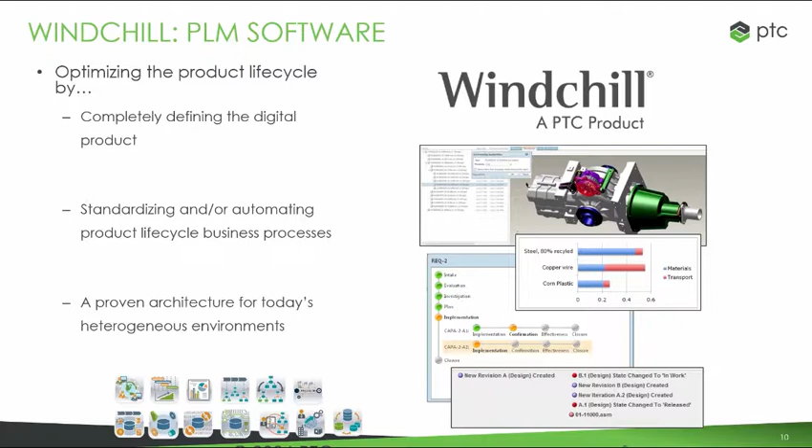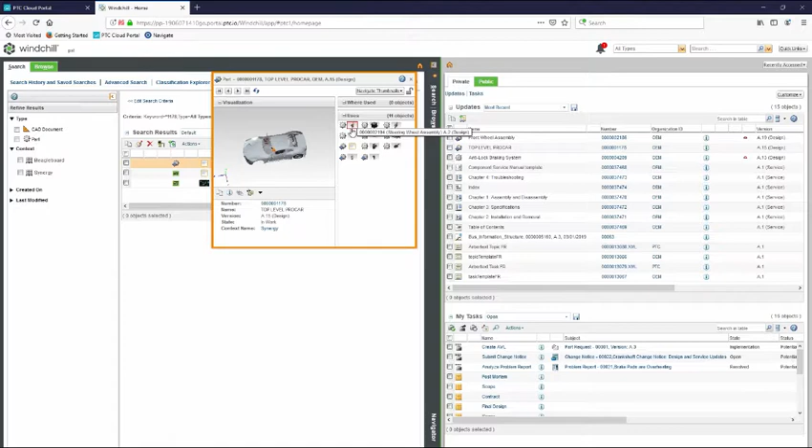If I go to our drop down here to our navigate thumbnails, we can see from our uses in our where-used tab, these are essentially the rungs of the ladder that we're going to use to go up and down our product hierarchy. From here, I can dive deeper down to the very bare nuts and bolts of this assembly, and I can easily go back if I wanted to. So my uses tab is going to take me further down to the nuts and bolts of my product, whereas my where-used is going to take me further up to my highest level.

Just a little bit more about the search. We can go here to our saved history and our searches. This is where I have essentially saved any searches that I'm going to come back to at a moment's notice. So if I wanted to search by all changed objects, all dynamic documents, all part lists, I can simply come back here and search for that immediately. Take this, for example, any and all parts with documents—I can simply very quickly come and search from here.

And also from our saved search, we also have any recent searches, similar to what we were seeing in our splash page initially. So anything I search within the very recent past, I can come back and search for as easily as possible.

And if we come to our advanced search features, this is where we're going to see more of that refinement to search more easily. So here I have some more part types to choose from if I wanted to search for them down to the nitty gritty, whether that be my customer experience, my publication structure, all of these different types of objects within Windchill. I can simply check off and look for them. This is also where I can search via the product context that I've organized all my products under, along with any specified criteria. And from any of these specific ways that I'm looking for it, I can save that search for me to easily access later.

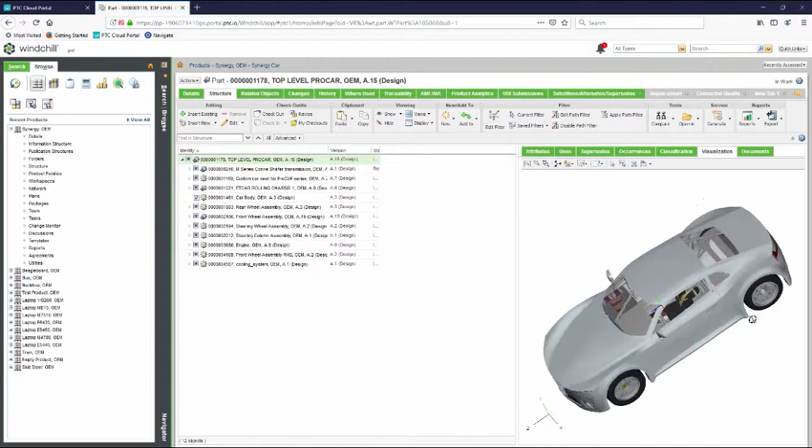Here we can see those visualizations that are pervasive throughout Windchill. This is just a bigger visualization along with our structure page. Like I showed you before in the thumbnail navigator, I can visually interrogate, zoom in and zoom out as needed, everything short of actually authoring the CAD data itself. And this is fully CAD agnostic—no matter what CAD tool was used to build this, I have the ability to visualize that information within Windchill.

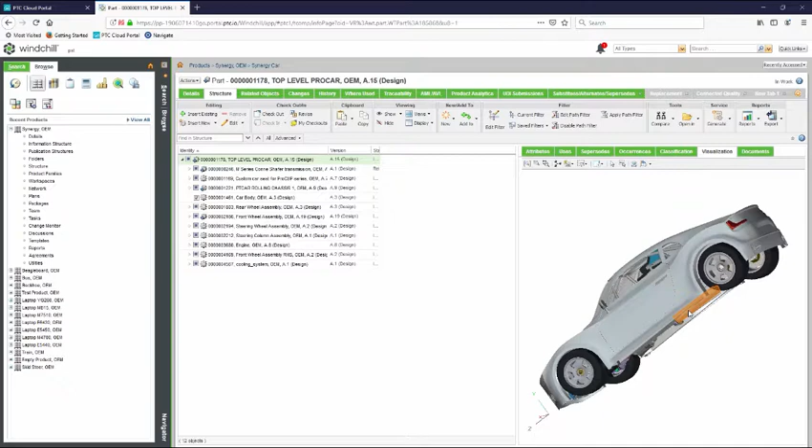Now I'm going to dive a little deeper into this front wheel assembly. As we can see, within our structure everything is version and state controlled, which goes along with that checking in and checking out functionality I'll show you later. When I check something out, work on it, and check it back in, the iteration of that version—A.2, A.5—will increase as necessary. And if I make a revision instead of simply checking it back in, it will move to B.1 and create essentially a side stream if necessary.

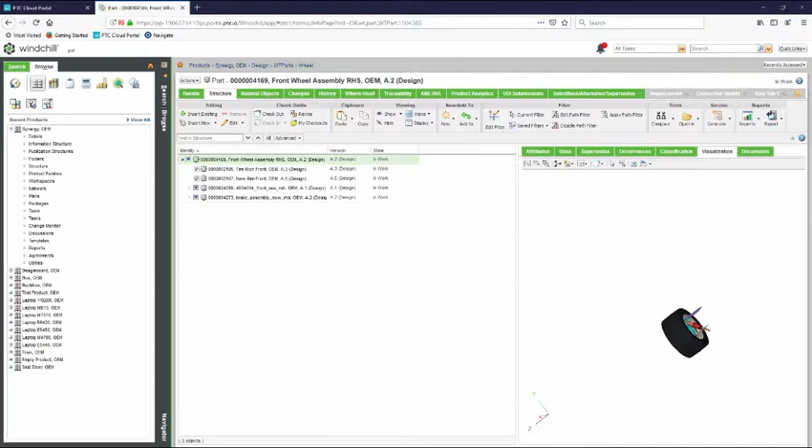So what I'm going to do now is open this in Creo View just to show you what that looks like. Creo View is our lightweight, CAD agnostic tool for visualization, representation, and annotation. So no matter what CAD tool generated this information I'm currently looking at, I have the ability to visually interrogate it, similar to how we were looking at those visualizations within Windchill itself.

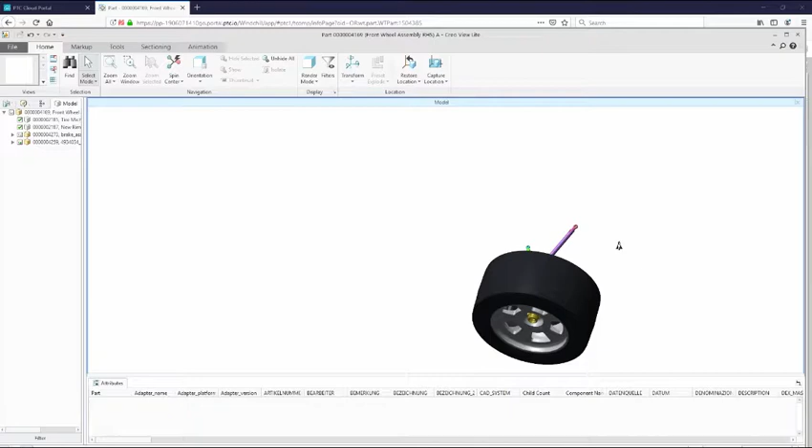Not only can I rotate and fully interrogate this, but I can also create annotation sets. Those annotation sets will be saved against the object within Windchill itself, and they'll roll up to those WT parts we were talking about before. Let me show you what that looks like.

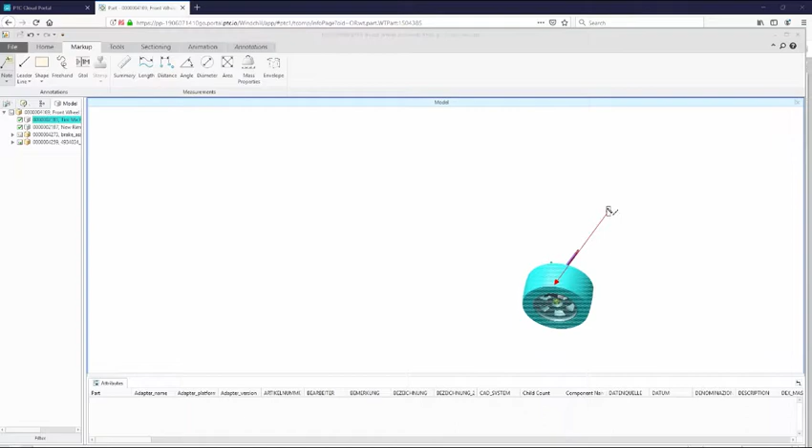Here we have our markup tool, and I'm just going to create a note with a leader. We're going to insert an attribute, specifically an attribute from Windchill itself—here the life cycle state of this specific tire. Creo View is going to look into Windchill, grab that information, and put that onto this leader as necessary. So we'll grab our lifecycle state, insert the name and the value, and hit OK.

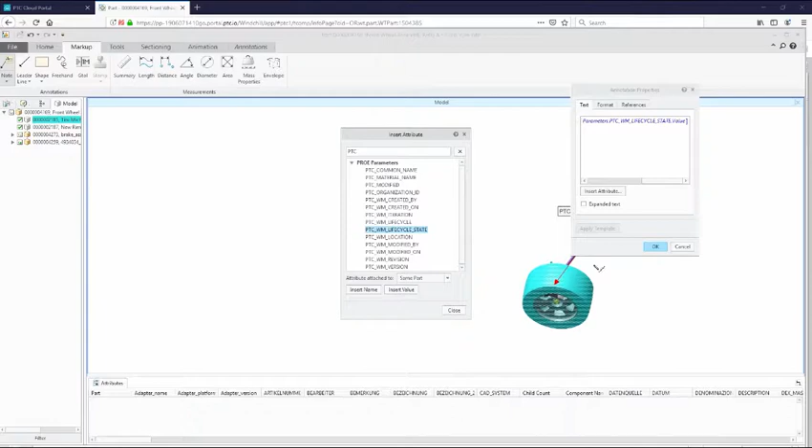And here we can see that this current tire is in a work state as opposed to a release state. This is now an annotation set that's going to be saved against this object within Windchill itself.

So here we're just going to save that annotation set. We'll call this lifecycle. And here we can define if we're the author, our telephone number, or any comments needed to keep our bookkeeping up to date. I'm just going to click OK.

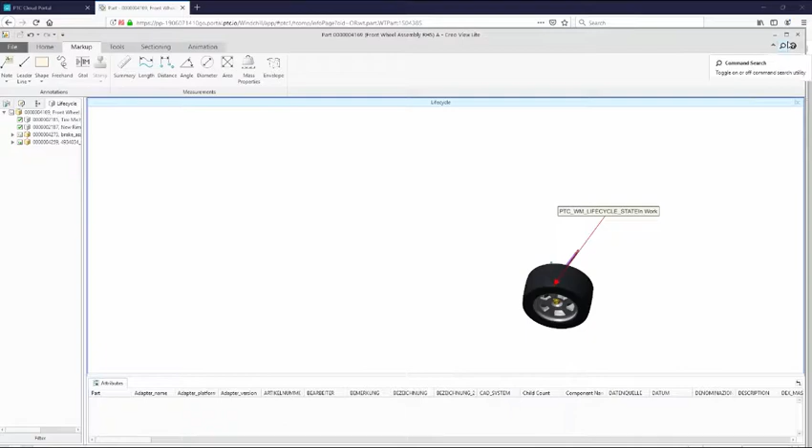Now the annotation set is going to be saved off against our application within Windchill, for anyone who needs to look at that information. What that really allows for is collaboration across multiple departments, whether or not they have that CAD authoring tool, and lets them participate in design reviews and other processes that would usually require a CAD authoring tool to do.

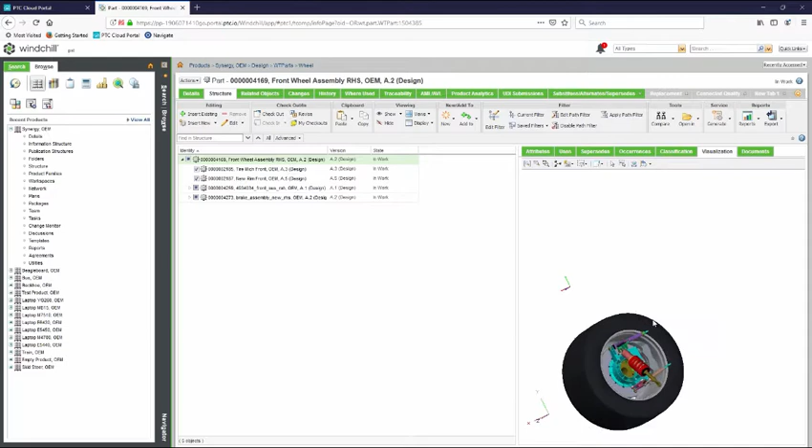Next, what I'm going to show you is the structure for our tire itself, a little bit deeper into that. So here we have that visualization, and currently all we're looking at are the top level WT parts of that object. Like I said before, these gray gears, these WT parts, are that central node of relatability for which you relate all the other information tied to that product within Windchill. So we're currently just looking at the top level.

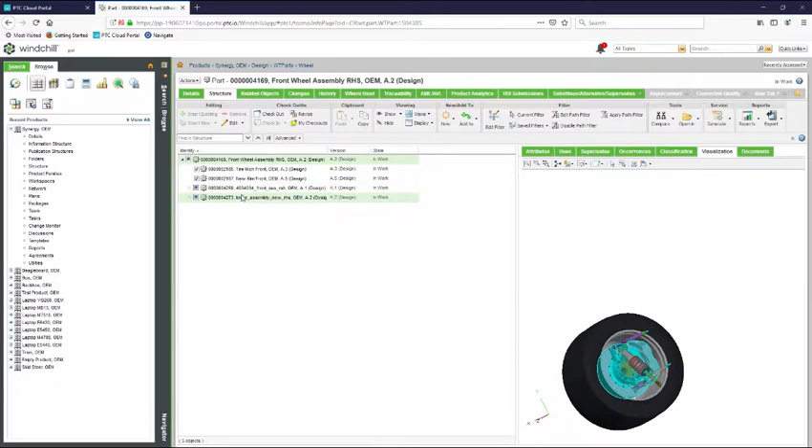So what I'm going to do now is select everything, and then expand all of our levels. Here I can choose to expand by 1, 2, 4, all, or n levels. We're going to expand by all levels, and this is where we can see all of the WT parts that are ultimately rolling up to that hierarchy, or that higher up WT part itself. Now that we're looking at everything, I'm just going to select all again.

Now, as opposed to showing just the WT parts, I'm going to be showing everything. So every document, every CAD document, every replacement part distribution target, everything that's rolling up to this object within Windchill, whether it's CAD information or not, you'll be able to see from here.

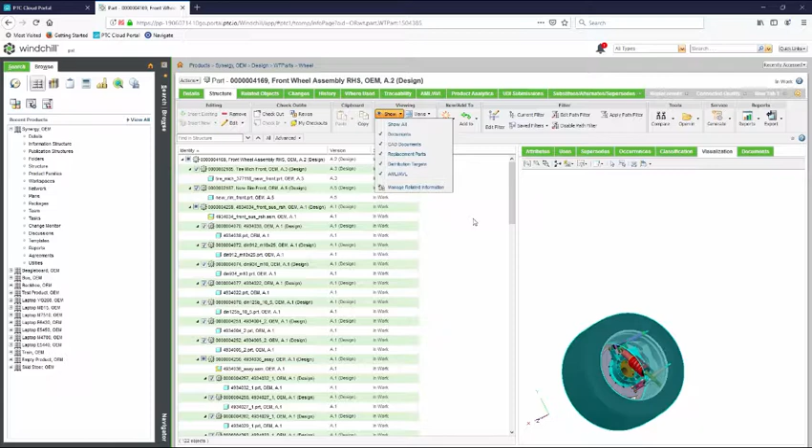If we take a second to peruse through here, we can see we have some PRT files specifically for this, but if we look a little further down, we have our documents as necessary. We also have various plant information, everything that ultimately relates and goes into describing this product for its life cycle. And as we can see, they are all completely and utterly versioned and state controlled as necessary.

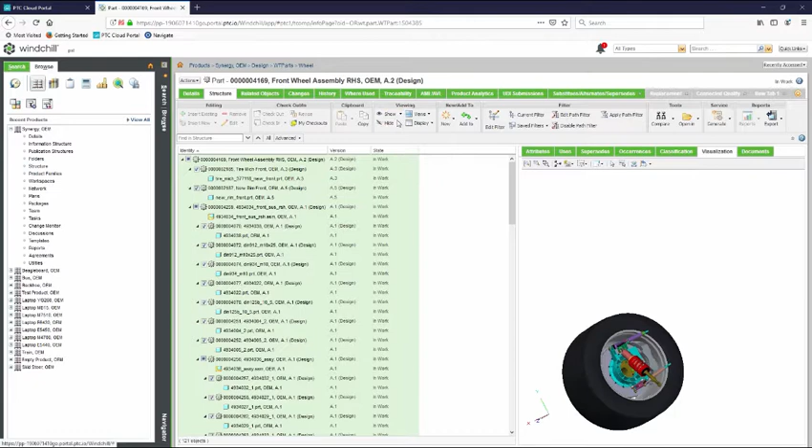Okay, so let's clean this up a little bit. Don't need to be looking at everything. So let's just go over these tabs here.

Here we can have our attributes tab, which is that same rich level of information we were seeing in our details tab. We can also see any of our occurrences or classification that we're looking at for this specific object directly from within here.

Just to show you what checking out looks like, if I wanted to bring this and work on it separately, I would have to check out this object. Ultimately that means only I can be working on this. So right now within our PDM system, that front wheel assembly, only I as Pat the product manager can be working on it. Until I check that back in, no one else can be working on that.

So that was just for that. Now we're just going to check that back in, and we'll just put test here.

As we can see, after I checked that back in, it went from that A.2 version all the way up to the A.3 version. That allowed me to iterate as needed without any second steps or side steps in order to do that. It does that automatically when I check the information back in.

As I was showing you before, this is where we can see all of our information. So if I wanted to see all the information rolling up to the specific WT part, I can simply hit show all. Or if I wanted to see something very specific, I can just go down to here. Along with that, we also have our views, which determine which specific columns we're going to see within our structure tab itself.

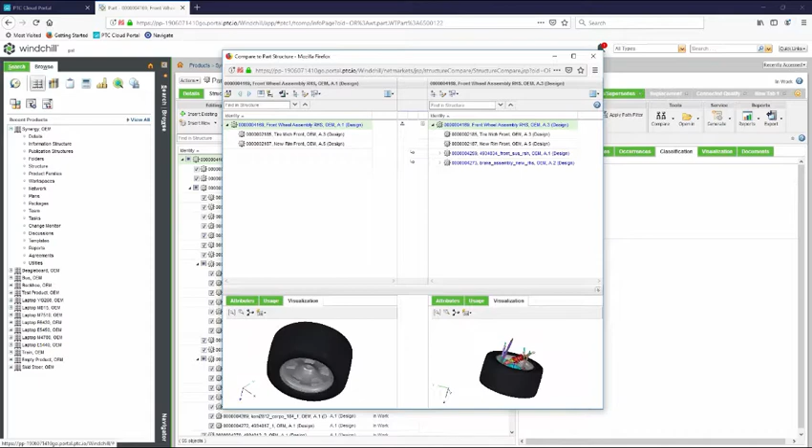So there's not really much difference here. Oh, actually there is a big difference. One of them has that brake assembly roll up, and the other one doesn't.

So we're just going to move on to a couple of the other tabs. And one last thing here, this is where we can see any or all the documents that are actually rolling up to them in a very easy way.

So from here, we can also see any of our objects that are actually related to this front wheel assembly. So anything that we have defined as being ultimately necessary, ultimately something that's required for this object is going to show up right here in our related objects.

Here under our changes, this is where we're going to see all of our issues and variances, our change requests, all of our problem reports for this specific object.

And of course, if you wanted to be looking at every problem report, we can simply come back here to our tab and view every single change request, change notice, all of that directly for all of our products within our system. And as we look to our history, this is where we can see any and every change that's currently happening for this project.

So this specific object's gone from A1 to the A3. If you wanted to understand better what's going on to actually have that happen, we can easily interrogate that from here. We also have that timeline for anyone who can actually visually recognize that.

And here we have our where used tab, and this is ultimately where we're going to designate where else this object is going to be used. So say, for example, we are a snowmobile company. We use kind of the same sort of ski assembly for all of our snowmobiles within our system.